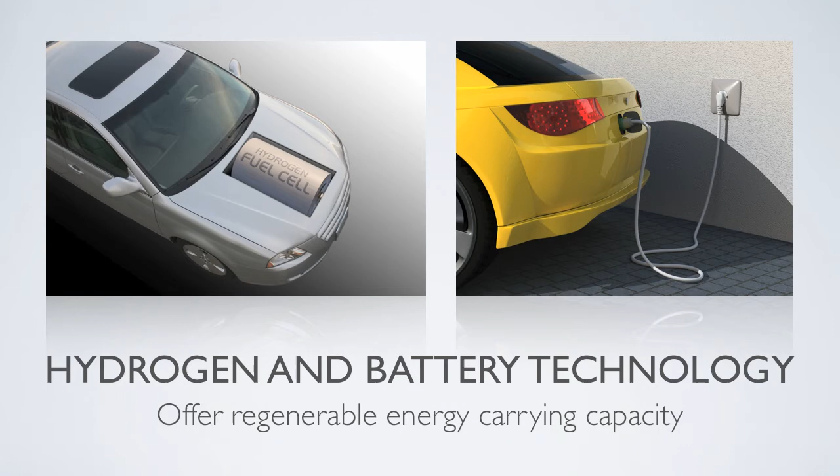Finally, both hydrogen and electric batteries offer regenerable energy carrying capacity. These differ from the aforementioned fuels in a subtle way. Hydrogen is produced industrially in one of two ways: steam reforming of natural gas or electrolytic separation of hydrogen from water, H2O. It is important to recognize that hydrogen gas deposits are basically non-existent on Earth. Thus, it takes energy to generate a fuel, which is in turn used to store energy.

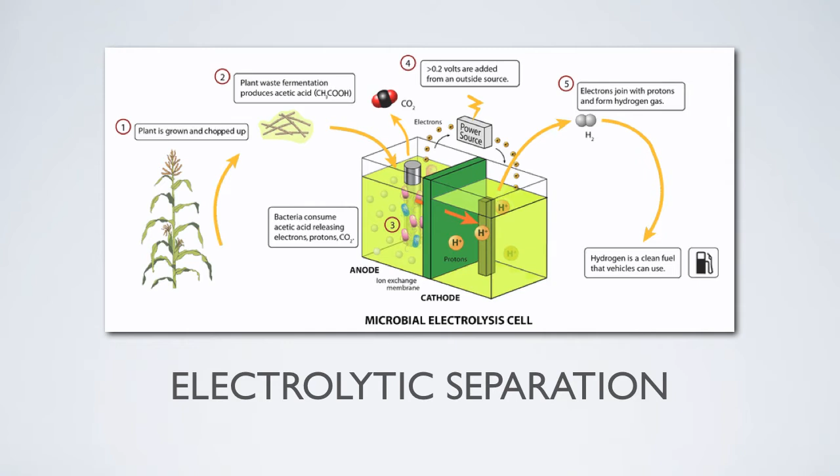The same can be said of battery storage technologies. These are considered energy carriers rather than energy sources because we cannot mine or drill them from the Earth's crust. They must be created. Hydrogen has a great potential to reduce greenhouse gas emissions because it is an excellent energy carrier without any carbon in it whatsoever. Thus, it will not emit CO2 into the atmosphere. However, hydrogen production and delivery infrastructure has a long way to go before it can reach the maturity of competing technologies.

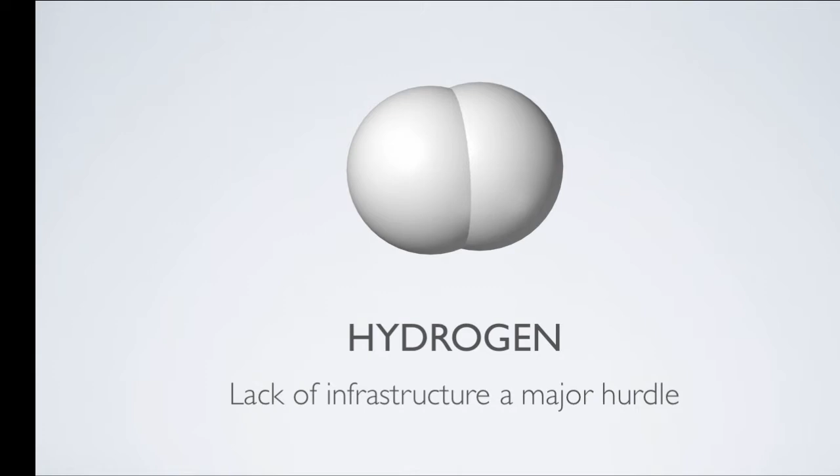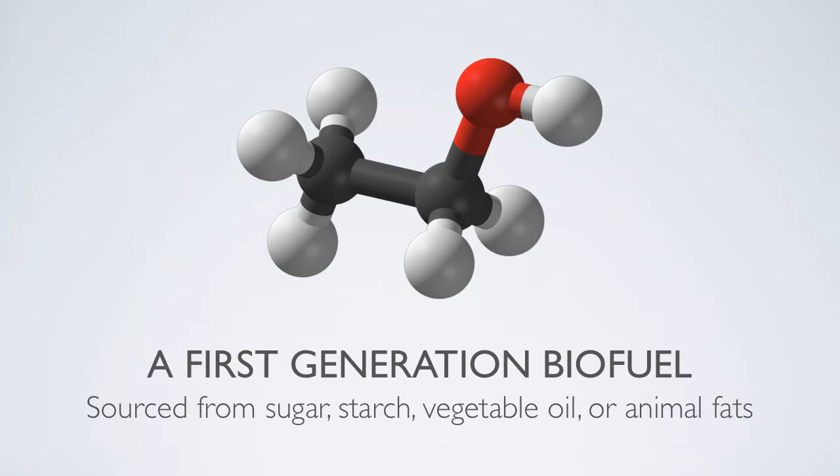Ethanol, bioethanol. Ethanol is known by many names and produced by many pathways. It is by far the most abundant biofuel produced globally, thanks to industrial fuel ethanol production from corn in the US and sugarcane in Brazil. Currently, ethanol is categorized as a first-generation biofuel. That is, a biofuel made from sugar, starch, vegetable oil, or animal fats using conventional technology. In fact, ethanol was among the first generation of transportation fuels in the US. Dating back to the early 1900s, it was one of two fuels available for the Ford Model T.

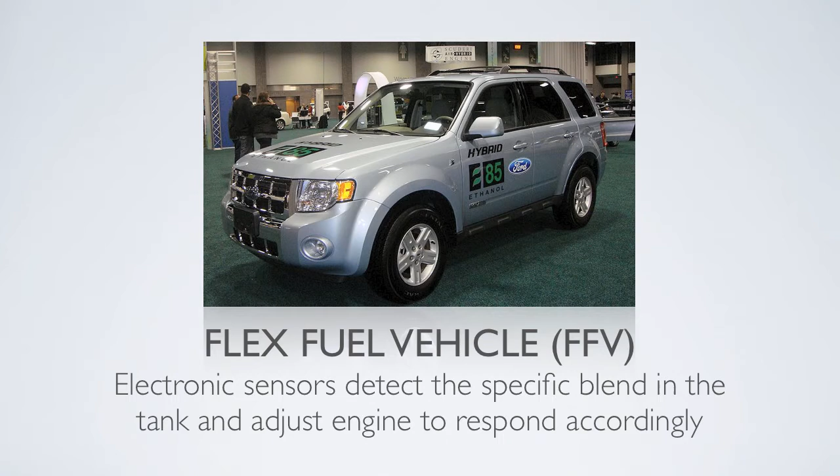A flex fuel vehicle, or FFV, is an alternative fuel vehicle with an internal combustion engine designed to run on more than one fuel, usually gasoline blended with an alcohol fuel, and both fuels are stored in the same common tank. Flexible fuel vehicles are designed to accept any proportion of the resulting blend in the combustion chamber, as fuel injection and spark timing are adjusted automatically according to the actual blend detected by electronic sensors. Today, ethanol is typically blended with gasoline in a ratio up to E85, that is, 85% ethanol and 15% gasoline. The popularity of several ethanol gasoline mixtures, including E10 and E85, has allowed vehicle manufacturers to optimize performance for these fuels.

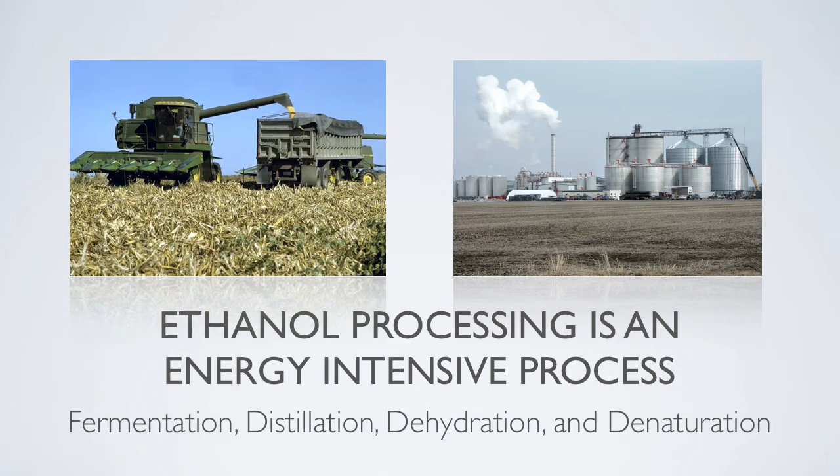As mentioned previously, in the United States, the vast majority of fuel ethanol is derived from corn. The processing steps require fermentation of sugars, distillation, dehydration, and optionally a denaturing step, in which the ethanol is mixed with other chemicals to form an undrinkable mixture. Distillation and dehydration can be very energy-intensive processes, which developing technology seeks to minimize. The carbon intensity of ethanol combustion within the conventional pathway is 65 grams CO2e per megajoule.

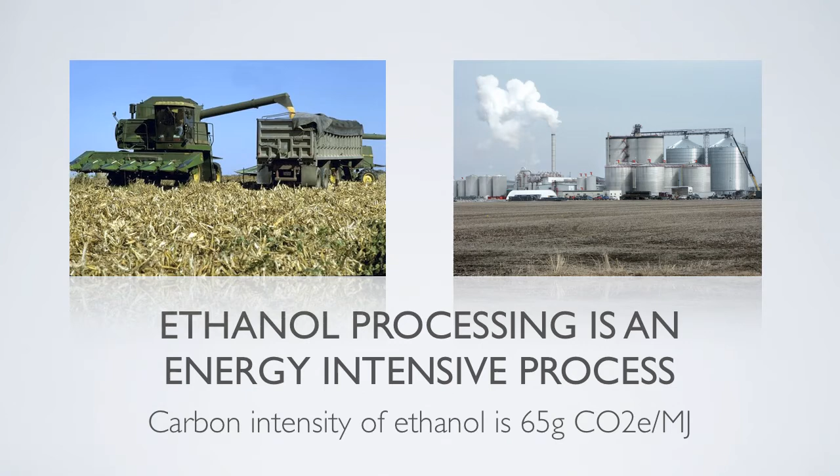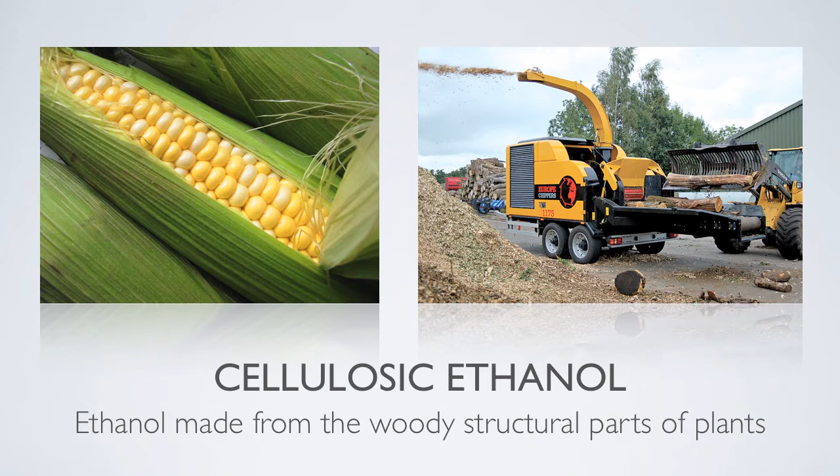Additionally, there are new efforts underway to produce cellulosic or lignocellulosic ethanol, ethanol made from the woody structural parts of plants. This could lead to many changes in the industrial production of ethanol, because it drastically increases the number of available feedstocks, from stalks and husks to grasses and even wood shavings. A competing, but no less transformative technology seeks to use algae to produce ethanol from biomass. Developments in membrane technology to aid the energy-intensive ethanol water separation stage are expected to come within the next 12 to 20 years. According to a National Science Foundation and Department of Energy report, the key bottleneck for these advanced biofuels is the lack of technology for the efficient conversion of biomass into liquid fuels.

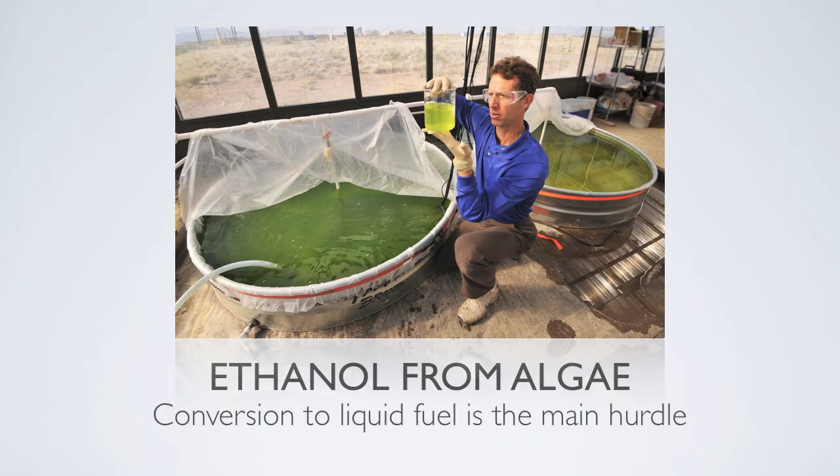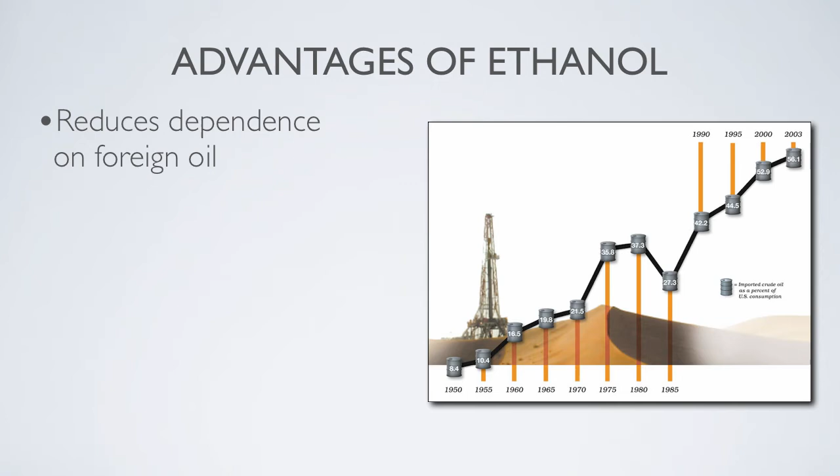Advantages of ethanol. According to the EPA, much of the increased interest in ethanol as a vehicle fuel is due to its ability to displace gasoline consumption from imported oil. As a renewable fuel source made from corn, E85 reduces life cycle greenhouse gas emissions, which include the energy required to grow and process corn into ethanol, by 15 to 20% as compared to gasoline. E85 made from cellulose can reduce emissions by around 70% as compared to gasoline.

E85 can further reduce emissions of certain pollutants as compared to conventional gasoline and lower volume ethanol blends. For example, using E85 reduces carbon monoxide emissions and provides significant reductions in emissions of many harmful toxics, including benzene, a known human carcinogen.

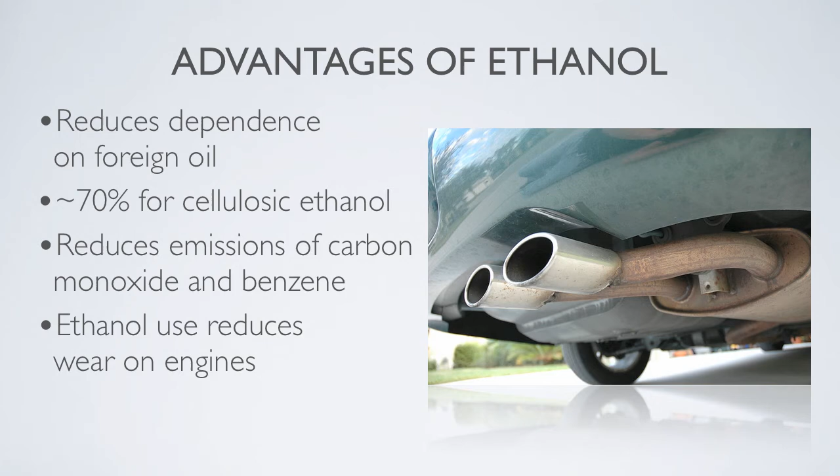Not only does ethanol reduce emissions, but it can also reduce wear on engine parts. Blending biofuels with a petroleum-based fuel has the twin advantages that even relatively small percentage additions will result in a substantial total volume of gasoline substitution, and the present infrastructure for distributing fuels can be used largely unchanged. Recent studies have suggested that increasing ethanol ratios to 15% poses low risk of harm to the older cars still on the roads, those built from 1994 to 2000.

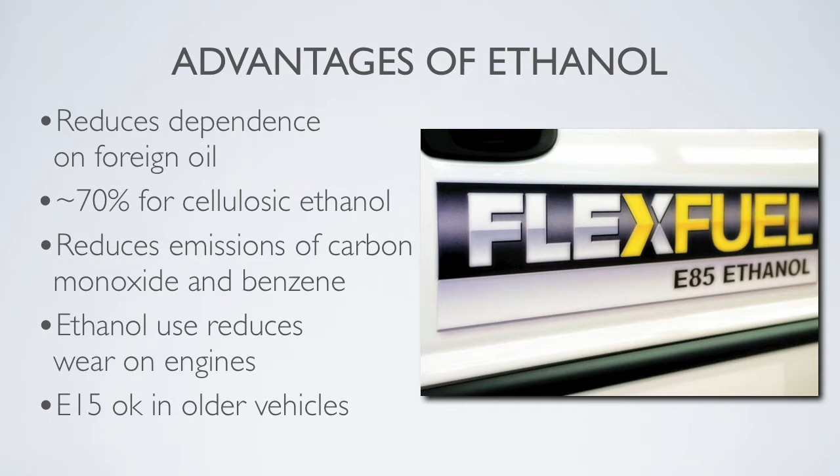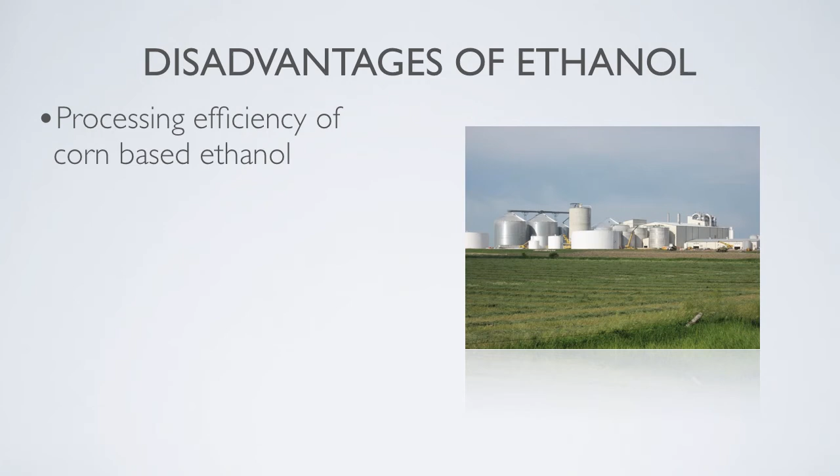Disadvantages. One of the major criticisms of ethanol as a fuel is the processing efficiency. Currently, the first-generation processes for the production of ethanol from corn use only a small part of the corn plant. The corn kernels are taken from the corn plant, and only the starch, which represents about 50% of the dry kernel mass, is transformed into ethanol.

There have been numerous studies on the net energy balance of ethanol, which have suggested that producing a gallon of ethanol fuel requires more than 76,000 BTUs of energy, which, as a reminder, is the energy embodied in a gallon of ethanol. These studies typically consider food-grade ethanol as the processing pathway, and rarely account for current and alternative fuel manufacturing techniques. There is now consensus that there is a net positive energy balance for ethanol.

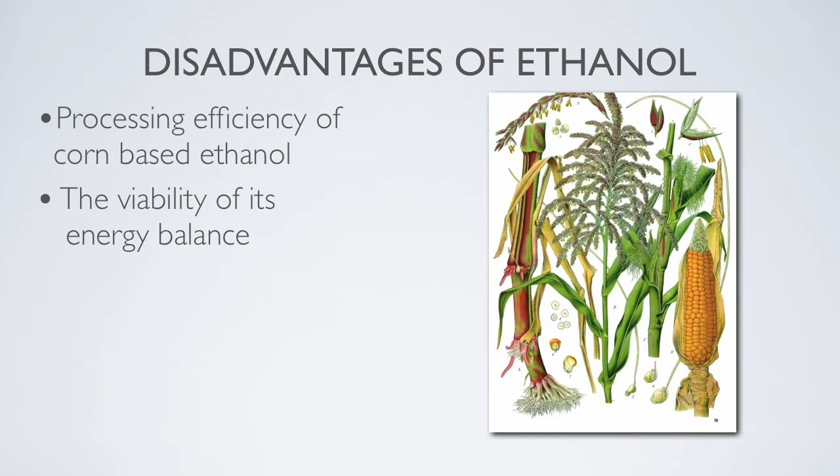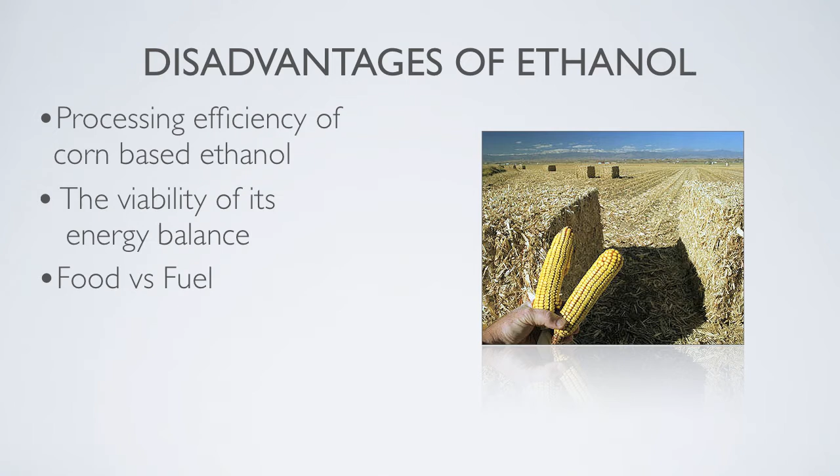Another associated criticism is that bioethanol necessarily diverts water, land, and grains from other uses. This is known as the food versus fuel debate. The contention is that any shortages caused by corn or sugarcane being converted into fuel will translate into increased grain prices throughout the world. These concerns may be lessened by the realization of lignocellulosic or algal ethanol technologies, but only time will tell.

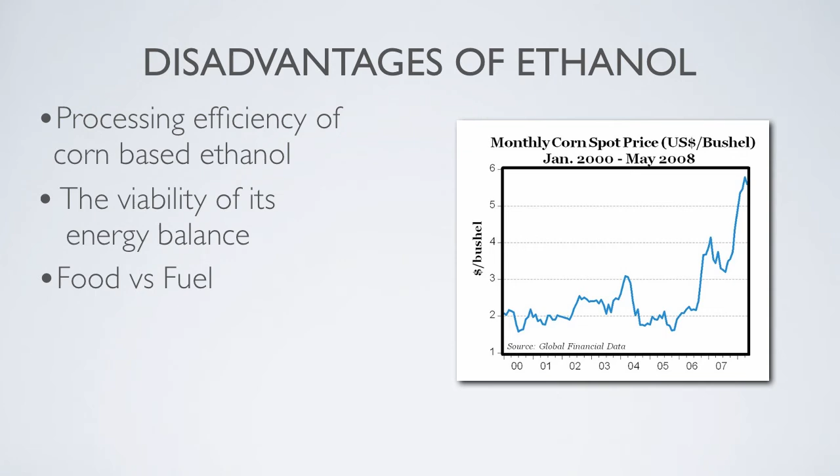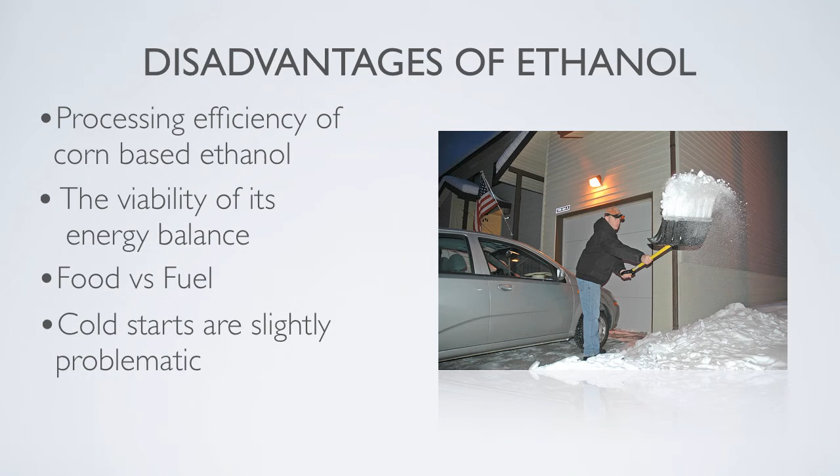A practical disadvantage of ethanol is that the higher blends, E85 for example, have poor cold start characteristics. This is generally addressed by creating a winter blend, which, though still labeled E85, contains 75% ethanol. Finally, much of the ethanol market in the U.S. is supported by federal subsidies. This makes the issue of ethanol fuel inherently political and funding unpredictable.

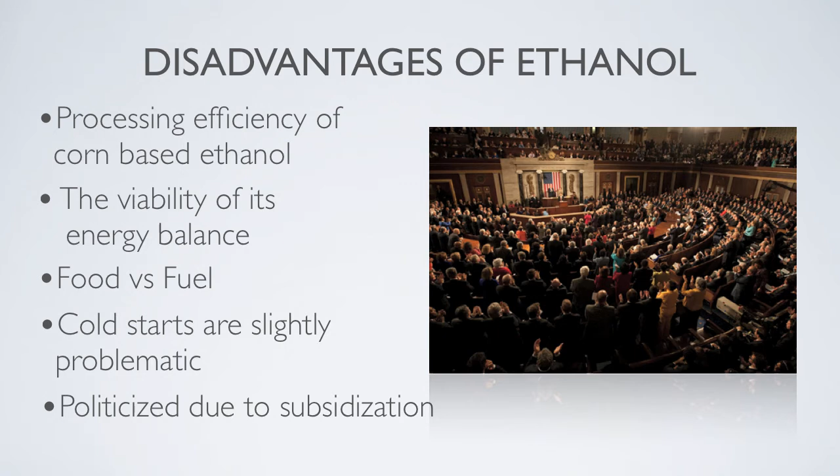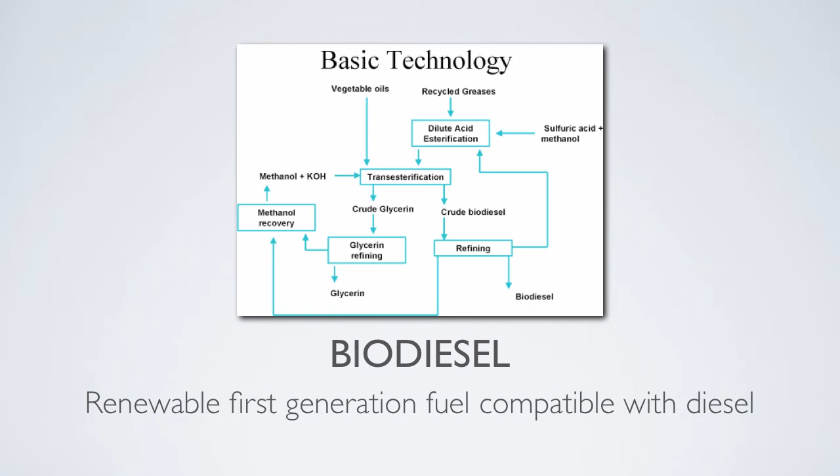Biodiesel, renewable diesel, FAME. Biodiesel is a renewable first-generation biofuel, compatible with diesel engines. There are a few pathways to biodiesel creation, but the important takeaway point is that biodiesel is not actually a hydrocarbon, like diesel, but rather a fatty acid methyl ester, FAME, which includes oxygen within the molecule. This leads to some characteristic differences when compared to petroleum-based diesel.

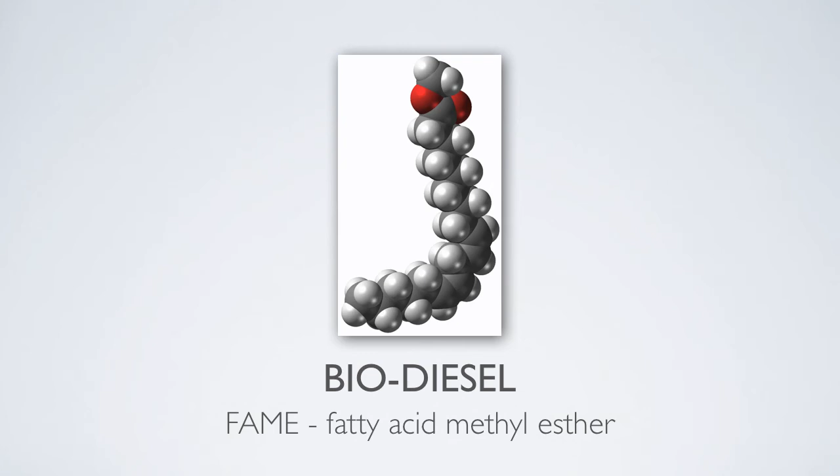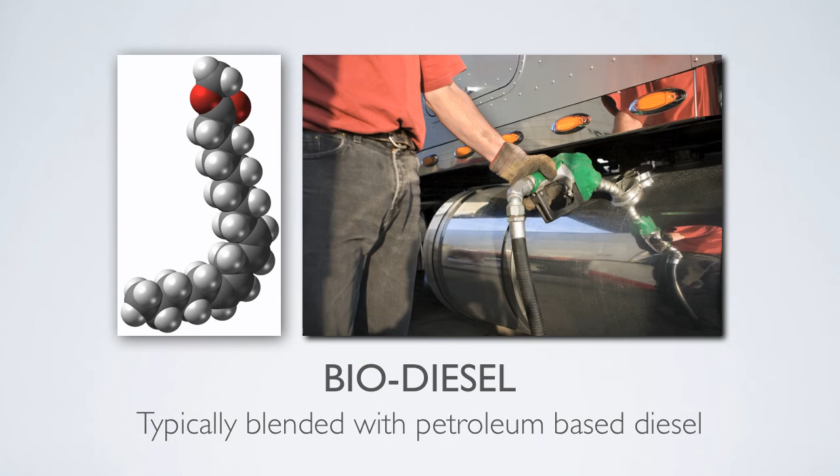For example, like ethanol, biodiesel has some issues with cold start performance. The molecules may congeal within the fuel line. Thus, most biodiesel fuel conversion kits include either a small diesel startup tank or a fuel line and tank heater for use under cold start conditions. Like ethanol, biodiesel is typically blended into the traditional petroleum-based fuel, which leads to biodiesel blend nomenclature. B20, for example, is a blend of 20% biodiesel and 80% conventional diesel.

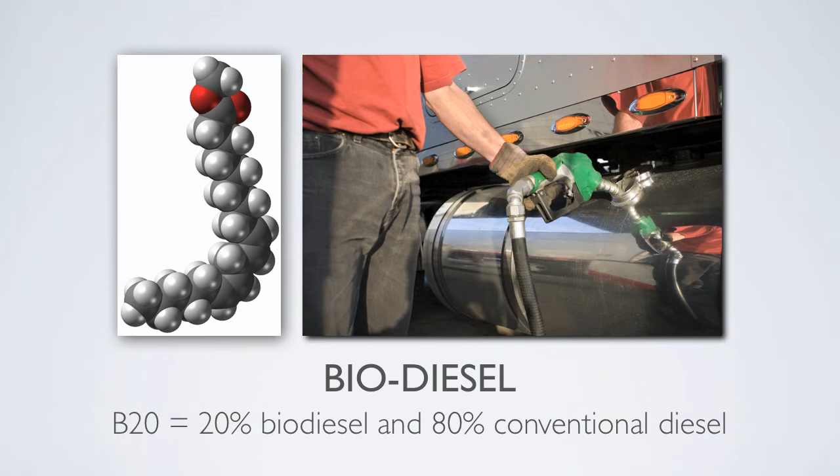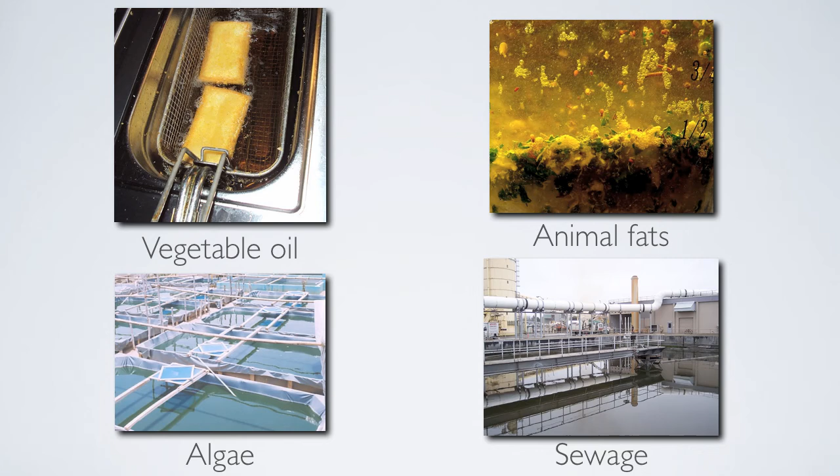Biodiesel can be processed from a number of feedstocks, including rapeseed and soybean oils, jatropha and other crops such as mustard, flax, sunflower, and palm oil, waste vegetable oil, animal fats including tallow, lard, yellow grease, chicken fat, fish oil, and even algae, which can be grown using waste materials such as sewage. For this reason, biodiesel has garnered a large following among the do-it-yourself crowd. Individuals can approach a restaurant and ask to pick up waste vegetable oil, which would otherwise be hauled off for a fee, and turn it into a fuel for their personal vehicles.

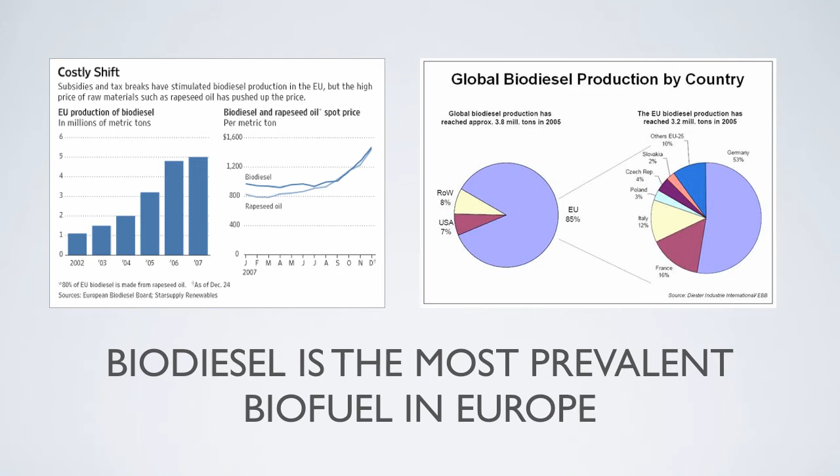Similarly, large-scale waste treatment operations are now recognizing an additional revenue opportunity by finding partners to source biodiesel purchasing contracts for diesel vehicle fleets. Biodiesel is the most prevalent biofuel in Europe, where diesel engines are more common. As such, there are many European vehicle manufacturers who are advancing engine technologies to handle biodiesel blends. Be mindful that biodiesel greenhouse gas emission intensities can vary widely based on the feedstock and processing pathway. They range from cooking oil and tallow with a CO2 intensity of 13 grams per megajoule to Brazilian soy, which weighs in at 72 grams CO2 per megajoule.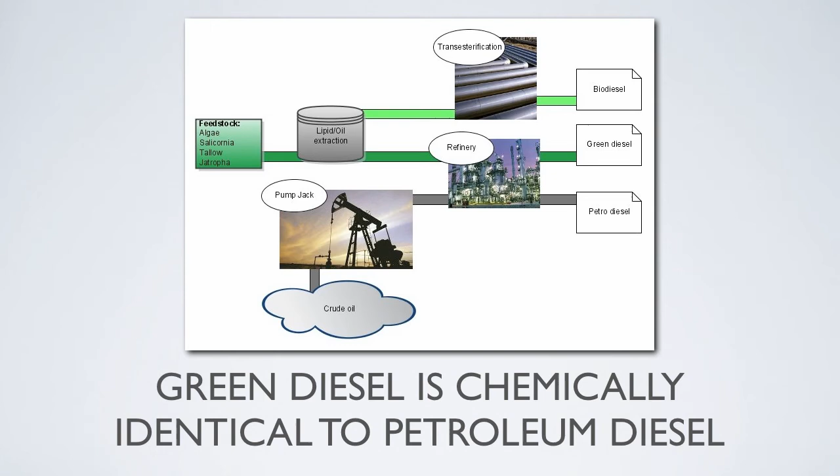Renewable diesel. In addition to first-generation biodiesel, there are technological advancements which produce renewable or green diesel, long-chain hydrocarbons chemically identical to petroleum-based diesel, but created from recently living biomass. Renewable diesel shows promise as a drop-in replacement for conventional diesel with little to no modification to the fuel system necessary. Advantages of biodiesel.

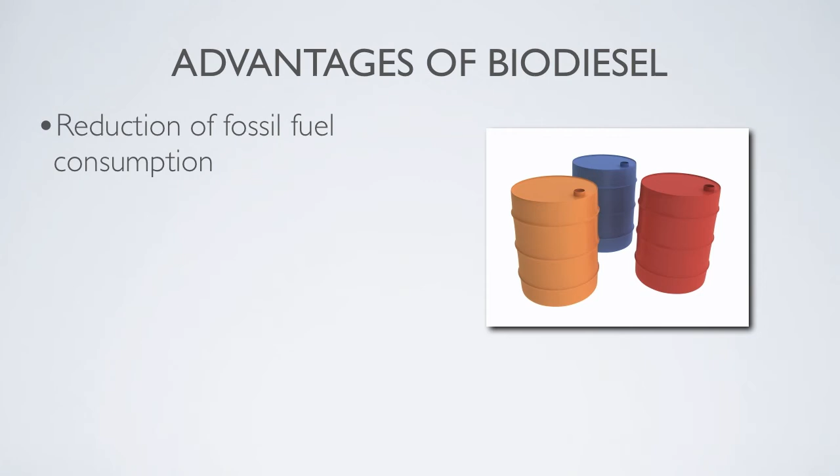As with ethanol, the major advantage of biodiesel is the ability to reduce fossil fuel consumption through use of renewable, domestically produced fuel. Low biodiesel blends, B2 and B5 for example, typically require no modification to diesel engines and fuel systems to operate. Higher biodiesel blends, B20 and above, require only modest fuel system changes.

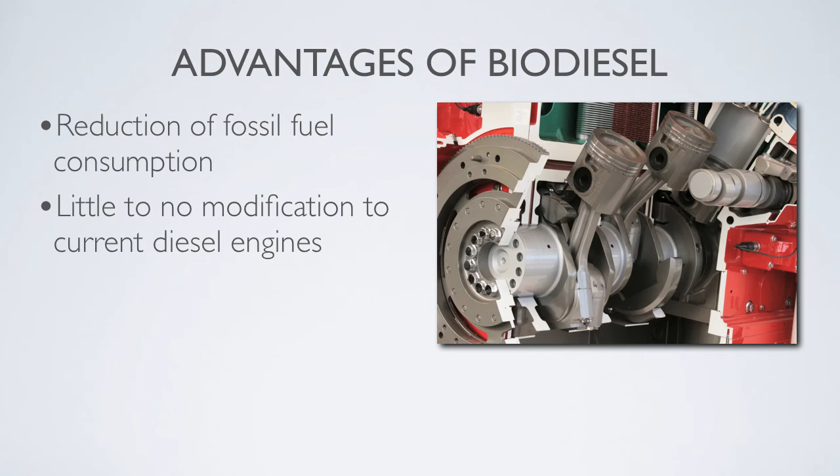Biodiesel is extremely easy to produce, to the point that individuals with little or no experience and expertise can get started on their own with a few tutorials. Biodiesel also has favorable viscosity and lubricity characteristics when compared to conventional diesel. Biodiesel is non-toxic and biodegradable and can reduce greenhouse gas emissions by 30% or more compared to petroleum-based diesel.

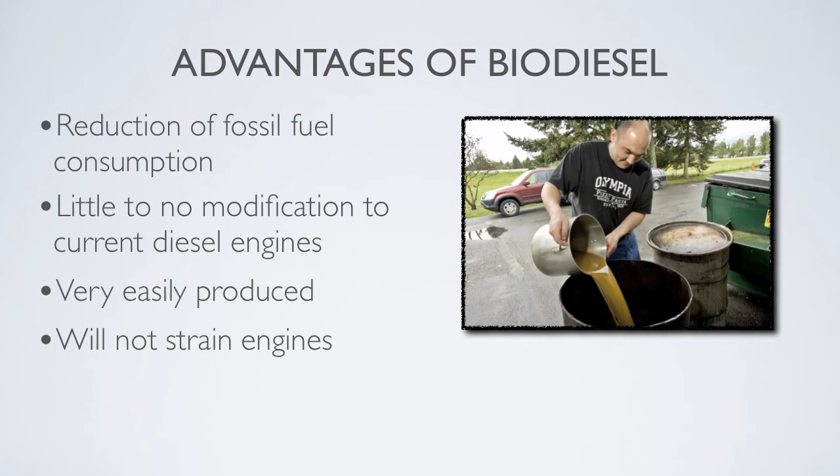Disadvantages. Although it is not usually detrimental to diesel engines, using homemade biodiesel can void some vehicle warranties. Because of the ease and distributed nature of production, some producers will adhere to quality standards more strictly than others. It is important to verify that any biodiesel purchased in the U.S. meets ASTM D6751-09A standards, or EN 14214 internationally.

A drawback that biodiesel shares with ethanol is the food versus fuel debate. Common feedstocks for biodiesel in the U.S. are soy and rapeseed, also known as canola oil. Once again, first-generation biodiesel is not chemically identical to petroleum-based diesel, and first-time introduction may release built-up engine deposits, forming a surprising and embarrassing smog cloud.

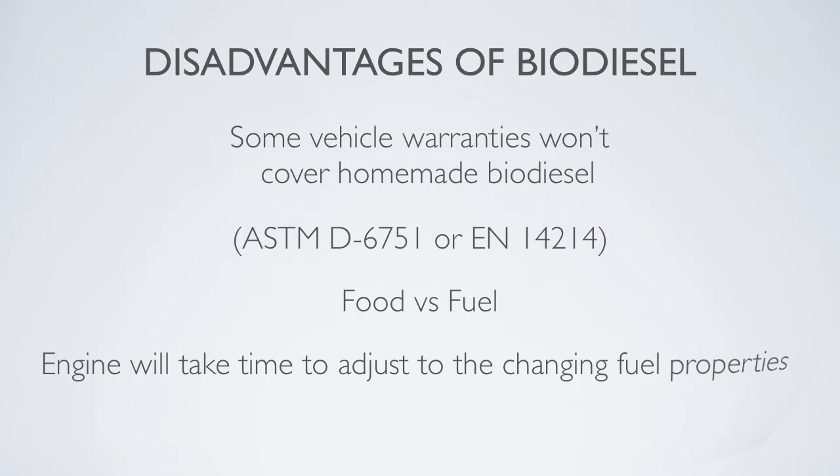Electricity. Battery electric vehicles. An electric vehicle, EV, uses one or more electric motors for propulsion. Electric vehicles differ from fossil fuel-powered vehicles in that the electricity they consume can be generated from a wide range of sources, including fossil fuels, nuclear power, and renewable sources such as hydroelectricity, wind, solar, and geothermal power, or any combination of those. The electricity is typically stored on board the vehicle using a battery. Vehicles making use of engines working on the principle of combustion can usually only derive their energy from a single or a few sources.

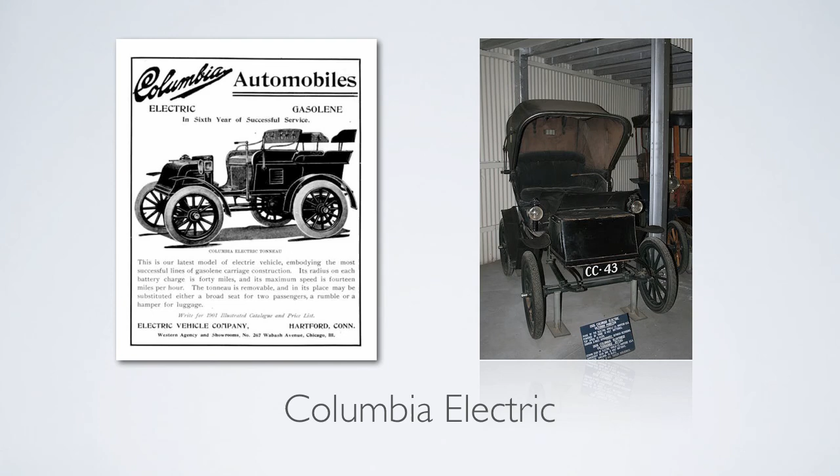Electric vehicles were among the earliest automobiles, and before the preeminence of light, powerful internal combustion engines, electric automobiles held many vehicle, land speed, and distance records in the early 1900s. They were produced by Baker Electric, Columbia Electric, Detroit Electric, and others. At one point in history, electric vehicles outsold gasoline-powered vehicles.

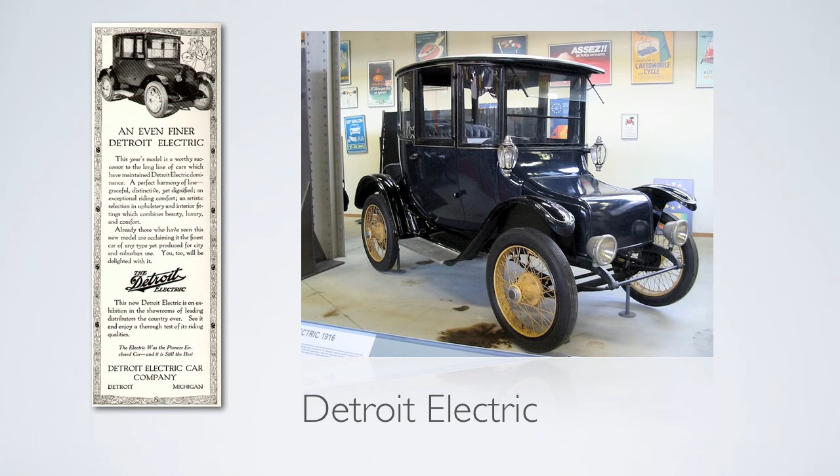The current generation of electric vehicles in the United States dates to early 1990, when General Motors introduced its EV concept two-seater, the Impact, at the Los Angeles Auto Show. The following September, the California Air Resources Board mandated major automaker sales of EVs in phases starting in 1998. From 1996 to 1998, GM produced 1,117 EV1s, 800 of which were made available through 3-year closed-end leases. Chrysler, Ford, GM, Honda, Nissan, and Toyota also produced limited numbers of EVs for California drivers.

In 2003, upon the expiration of GM's EV1 leases, the entire EV1 fleet was dismantled and crushed. The politics of this decision is chronicled adeptly in the motion picture on the subject, entitled "Who Killed the Electric Car?" The film explores the roles of automobile manufacturers, the oil industry, the U.S. government, batteries, hydrogen vehicles, and consumers in limiting the deployment and adoption of electric vehicle technology. Honda, Nissan, and Toyota also repossessed and crushed most of their EVs, which, like the GM EV1s, had been available only by closed-end lease.